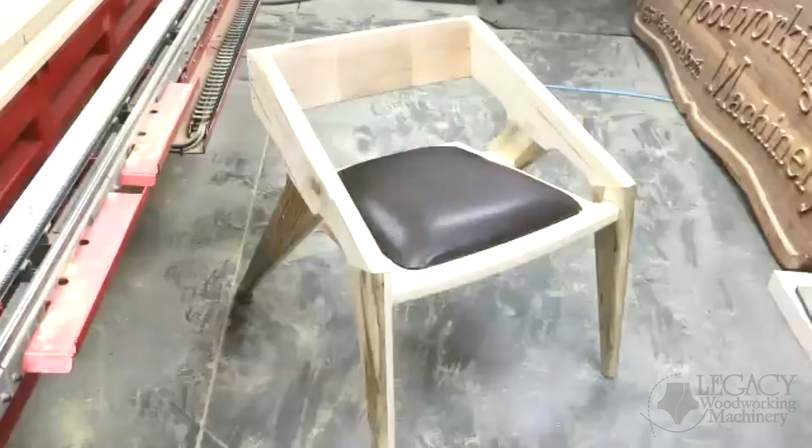I got the camera here, I'm going to turn it over. This is the chair, and this picture doesn't do it any justice, but it's a pretty phenomenal chair. It's pretty big - it didn't use any clamps to assemble or anything. It uses these dovetails to interlock everything together. He did put some brass pins back in here and did the seat and everything. This is a project they're working on - they're going to build and have ready for the school, so the students can build this project if they'd like. They're a pretty aggressive bunch of guys we work with - it's kind of fun to see everything they come up with.

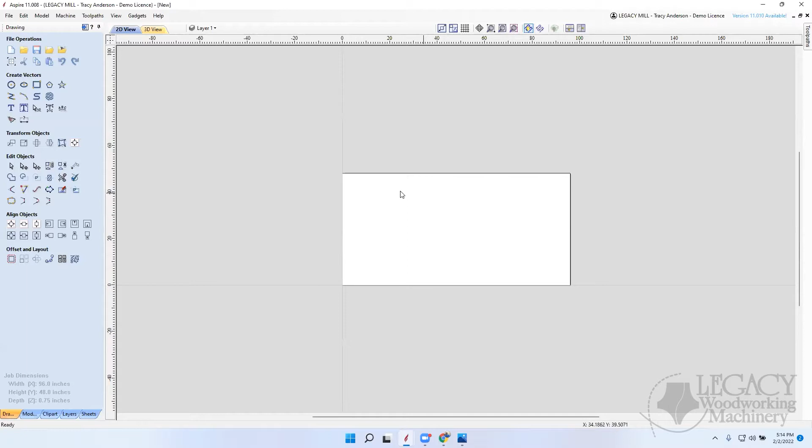So I'm going to start off by drawing a line on here. Then I'm going to move that line using my move tool, relative to where it's at in the y-axis, 39 inches. So this is my wall, and from the wall to the edge of the table, not the edge of the machine, but the edge of the table, is 39 inches, looking down from the top view. So my swing arm is going to be positioned right here in the center, land on this wall, and be able to swing right here. This will help us determine the length of the swing arm, so it's not too long and not too short.

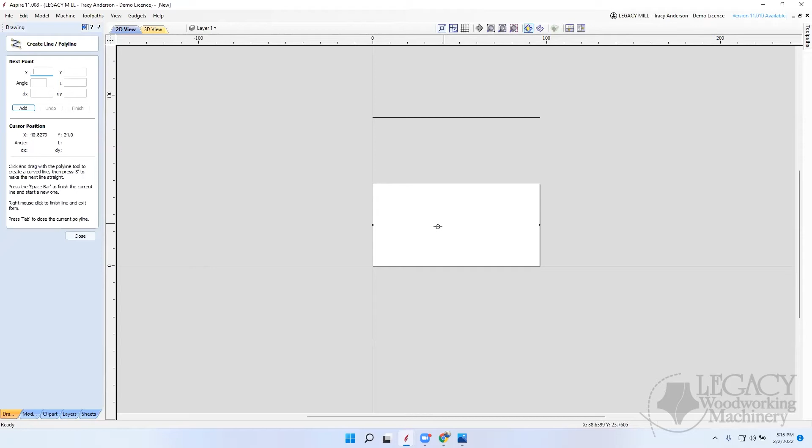I'm going to draw another line here to help me, just to give me a kind of reference. Let's get out of there and do that again. So this line is going to be down along the bottom here. And the same thing, I'm going to use this to move it up 16 inches, so 1/3 of the table, like so. So I want the arm to end right here, so it's going to swing back and forth like this. And the hose will reach this corner when it's here, and when it's in the center, it'll reach back to this edge. That'll give me a nice center for the end of the arm.

So depending upon the size of the hose you're going to be using, you can build this differently. I'm going to build it as 6-inch, but you can obviously build it as 5.

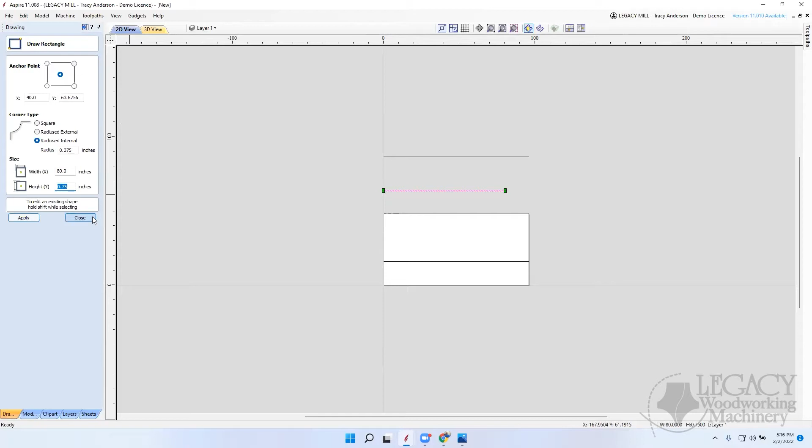So I'm going to draw a top view of the part. I don't know how long I'm going to make it yet, so I'm just going to draw it up here like this. This says 80 inches, and I'm going to make it 3/4 of an inch, 0.75. Okay, and then, oh, it looks like I have radiuses on those corners. Let me go back in and fix that real quickly. Yeah, let's do a square corner, not a radius.

I'm just going to Control-C and Control-V to copy and paste, and then I'll use this move tool. In the y-axis, I'm going to move it. I want the opening to be 6 inches, so I'm going to move it back 6 and 3/4 of an inch, so that I have 6 inches spacing between these two. So this is a top view - these are actually the side pieces that go down, and then, of course, I'll have a piece in the middle. It'll be along the top.

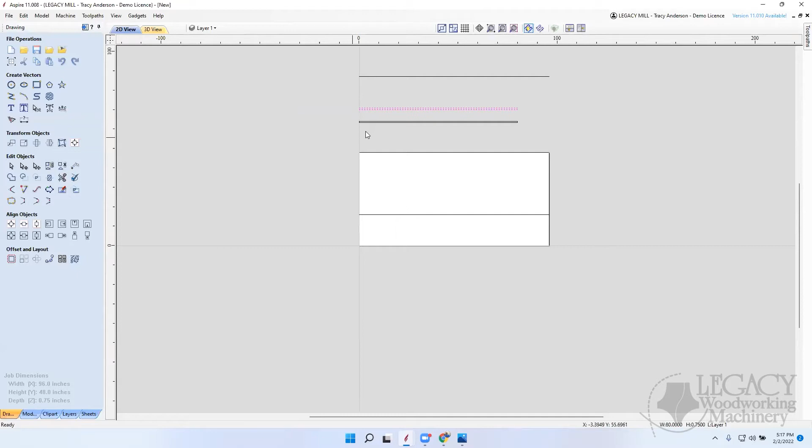So we can draw that in real quickly just by drawing another rectangle, from this corner to this corner. I don't know the length yet, but I'm not worried about it. I'm just getting the basic construction, and then we'll figure out the length.

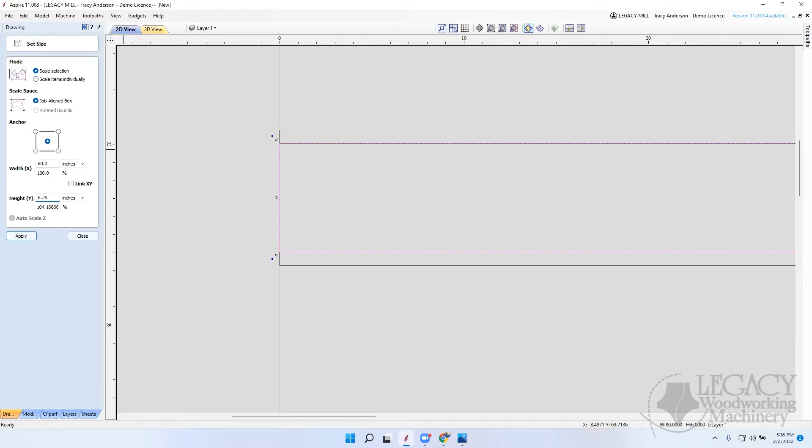Now, when I join these together, I like to cut a rabbet in here for relief. I've got it selected, I'm just going to increase the size right here. We'll unlink it, so it's still 80, but we're going to make it 6.25 inches, adding the next decimal place. What that does is make it go in 1/8 of an inch. So I'm going to cut this rabbet into the side pieces, and this top piece is going to fit down into it, making it easy to assemble and glue.

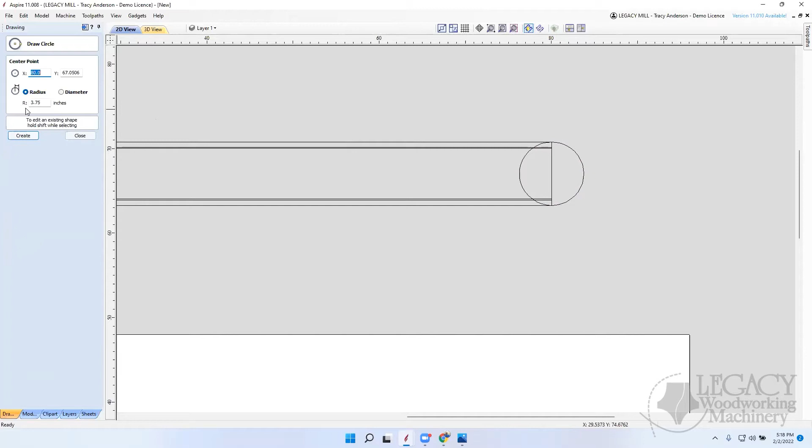Now we can focus on, we're going to have a radius down here that we're going to swing on. So I'm just going to build a circle, going from the center here up to there. I'm also going to create another circle that it'll actually pivot on, and I'm going to make it 1 inch in diameter. I'll just click here in the center, and it'll place it right there. So that's the pivot point, and this will show me the clearance.

So if I swing it, I can put this against the wall or the mounting plate, and it'll clear. So for example, if I was to draw the wall in here right now, I could draw something like this. We'll make the width 0.75, and let's make it about 32 inches, something like that.

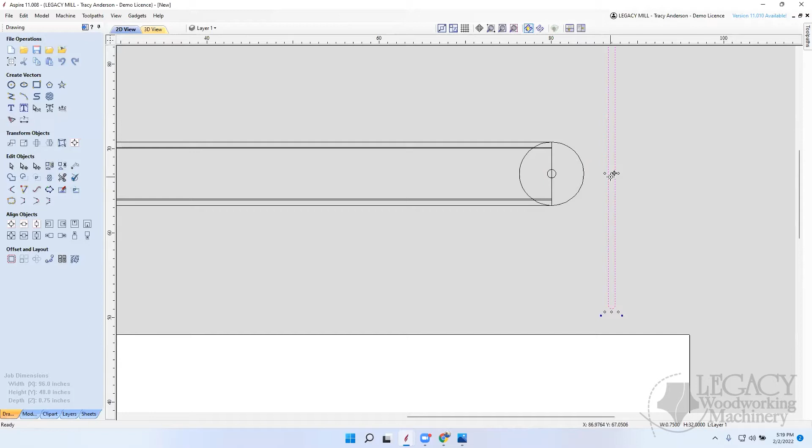Then we can take this, zoom in here a little bit, and just drag it till it snaps to that point. So that would give me 0 clearance. And so I might take this and move it back maybe 1/8 of an inch or something. So relative in the x-axis, I'll go 0.125. So when I swing it on this point and it goes 90 degrees, I'll have a little bit of gap here, so it won't be rubbing on that baseboard.

Now I'm going to draw one other circle in here because this board... I tried setting the settings for this mouse and it doesn't work. I got to get a different mouse.

This is a nightmare. Okay, but I'm going to swing this one out here to that point right there. So this one here is just to give me my clearance. So I'm going to delete it because I'm not going to use it.

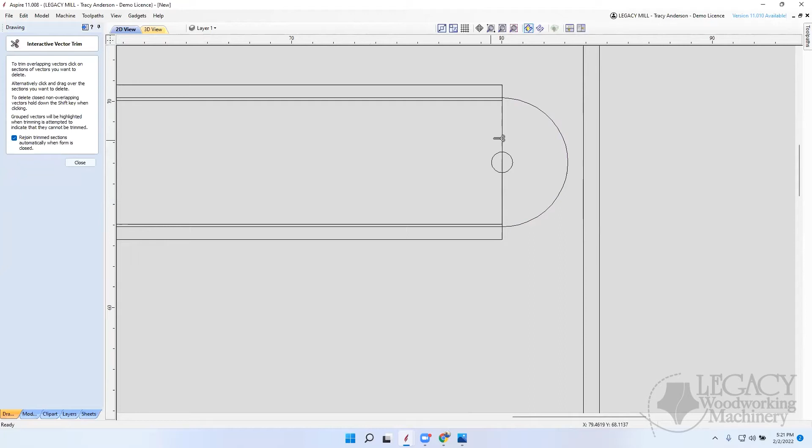And I'm going to use my scissor tool here to come in and trim this up. All right, there we go. So now this piece, well, let me trim that other part as well, and I'll have it rejoined. So now this piece right here, it didn't join. Okay, let me see if I can join these together. Oh, here's the problem, I've still got this vector right here, so you really need to zoom in. All right, let's see if that rejoined. If not, we'll join it later.

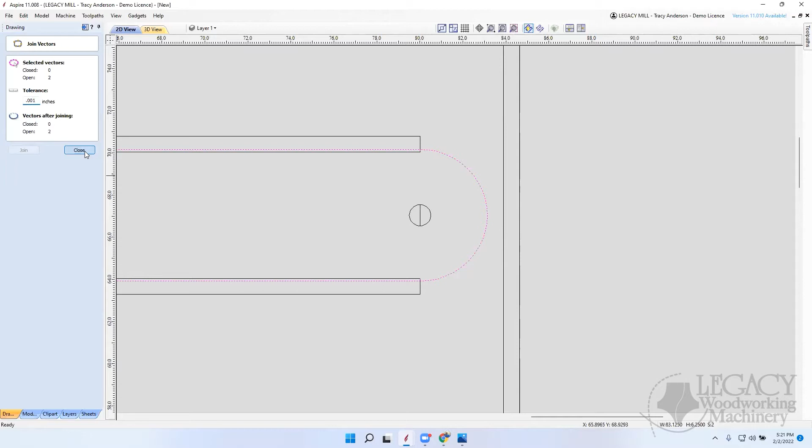No, it didn't. Okay, so if I take this guy and this guy, then I can join it. Maybe I can join it. No, it's not going to let me join. So we'll worry about that later. Right click and then select join vector. Join close vector. Move endpoints with smooth curve or with a line. We'll just do it with a line. All right, let's see if that works.

Hey Tracy, this is John. You bet, I found in version 11 that I can't join anything either. I always got to use join it with the little line segment or arc. I can't get it to join naturally anymore in this version. Interesting.

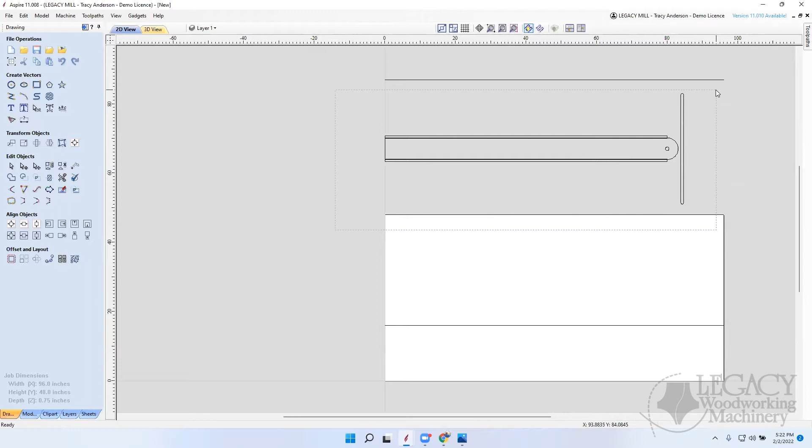All right, so here, this is the top view and the spacing from the wall. And so I'm going to take all of this and rotate it so that it's like so. I'll actually center it so that it's in the center of my table here. And then we're going to move it down. So let me just kind of get this close so that I can zoom in and move it.

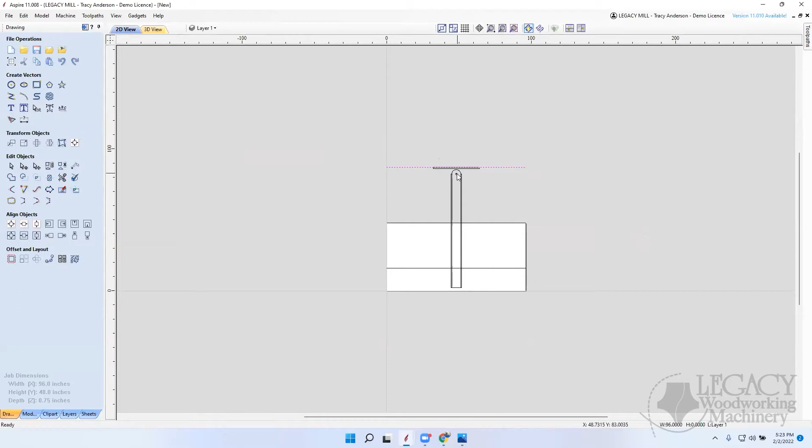So I'm going to grab this point right here and see if we can snap it to the center. Okay, so there it is along the edge, and we can ensure that it's centered on the table by using the align tools over here on the left. There we go. So again, this line represents my wall, there's my mounting plate, and I'm going to have a pivot point that it's going to swing on. So that means that this doesn't have to be so long, I can just bring it back to here. And that determines the length for me automatically.

We'll do that to all three of these guys.

Now if we were to draw a circle in here, we could kind of get the arc. So it's going to go right there to right there. That's the arc of the end of the thing, and that looks like it's going to work just fine. I could actually calculate the exact distance from here to here and here to here to make sure it's perfect, but this is going to be plenty close. It might only be an inch or so off, so this is going to work.

So I can erase these because we're not going to use those, they're just kind of guides. That's how the arm is going to be in relationship to the wall, the length of the arm and so on. So now we can start designing the parts for the swing arm.

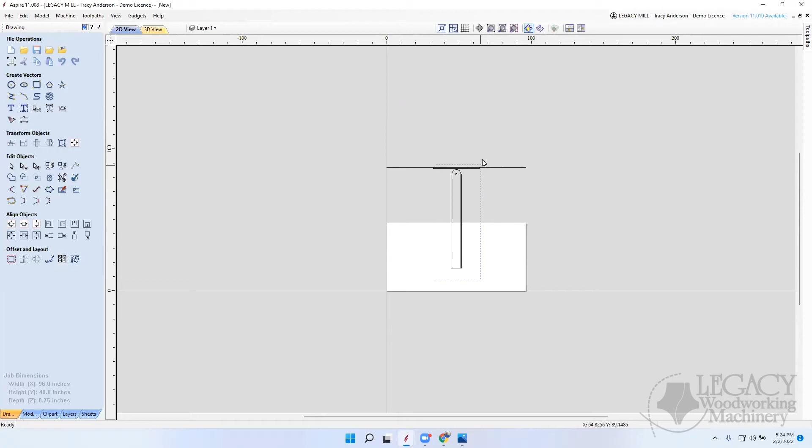I'm going to take all of this, Control C and Control V, and then I'm just going to move it over here out of the way. And we'll rotate it, something like that. So now we can work on drawing this part up.

Now we have the top part basically done here. We're going to cut holes into it because we want to remove as much material as possible to make this swing arm as light as possible. So we're going to do that on the sides and the top.

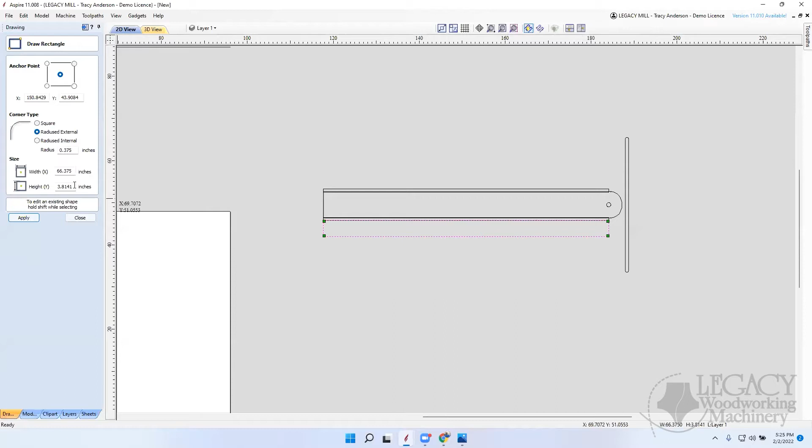So what I'm going to do now is draw a part, and I'll just use this as guides. All right, so it's that long, that's the length, but for the sides I'm going to make them as wide as you want - maybe like 10 inches or 12 inches or something like that. Let's make it 10 inches here.

I really need to get my glasses on. Okay, and then we can just move this down. So I can either drag it down, or use my arrows on the keyboard, or use the move tool. We'll just get it down here, something like this. So this is just kind of an outline of the side piece.

And I haven't found a really... oh, I have rounded corners in here as well. So I'm going to have to go back in and change this to square corners, like so.

I haven't found a really good way to do this next part, so what I'm going to do is draw a line from here to here. And it didn't snap to where I wanted it exactly. Let's try it again from here to here.

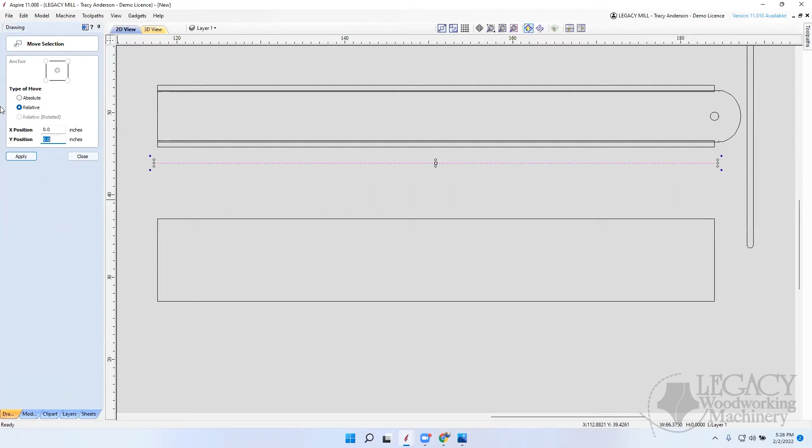Okay, now that line, I'll use the move tool, relative, we're going to go down 6.75. And I went positive, we want negative, so I'll undo that and go back down to minus 6.75. All right, so I just needed that point right there, and I needed an easy way to do that.

So I'm going to show you a couple of techniques. You may not like the way I do it, but it's one method and you can change it. I put it into node editing mode using the letter N, and I'm just going to drag this up to there. So now that is the shape, or close to it, the shape of what I want.

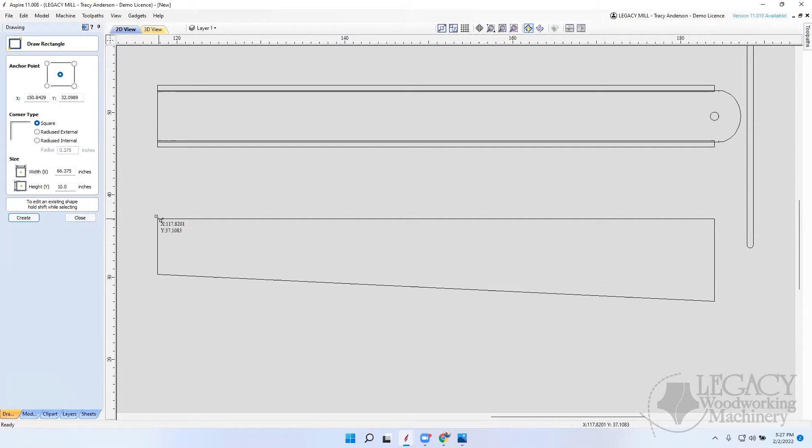I want it thicker here and as thin up here as possible. Now I know I'm going to have this part inside here. If I draw a rectangle - let's try that again.

Okay, I'm going to start right here and just bring it down like this. Now I can make it in the width - we'll make it 0.75. And then to get the length, I'll just drag it down to this edge.

So I'll double click on it so I get to that, grab this down, it's just going to snap to there. And then, of course, I can move it by grabbing this corner and just snap it to there. So that is the top piece right there.

And I need to have a flat piece down here for it to pivot on as well. And so by looking up here at this part - okay, interesting, I actually trimmed this incorrectly, it looks like.

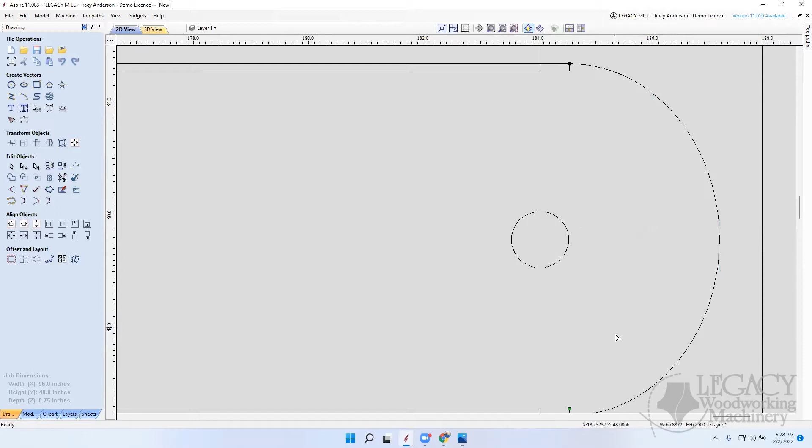Okay, this is what might have been screwing me up. I'm going to delete this point. Well, I'm not going to delete that point, I'm going to cut this. Cut the vector. So somehow this screwed me up, but we'll see if we can fix it real quickly.

And I don't want that. And I don't want that. And of course, that was part of that. We're having a good time here. Okay, so what I'll do is I'll trim these up.

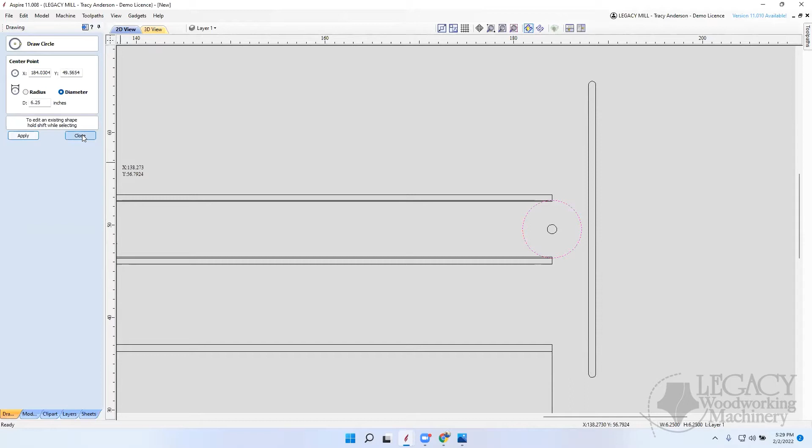Okay, now we're going to go back and draw our circle again from the center here up to that point. All right, so now I should be able to cut it and it should join it right back here. So this becomes part of this.

We're going to try it one more time and see what happens. We'll join them together. Not both of them, just the one. And we'll try it here as well.

Now let's see if that is right. Yeah, okay, that's how it works. I don't know what I had done to screw that up before, but now this looks right.

Okay, so that is the top part we've got in here. That's our pivot hole, and those are our side pieces. And so this is the side view, and that's the top part right there.

All right, now I'm going to need a flat spot down here because I'm going to have to pivot right here. So if I drew a circle in here the same size as this arc, I already had one, but I'm just going to draw one in like so to give me a position.

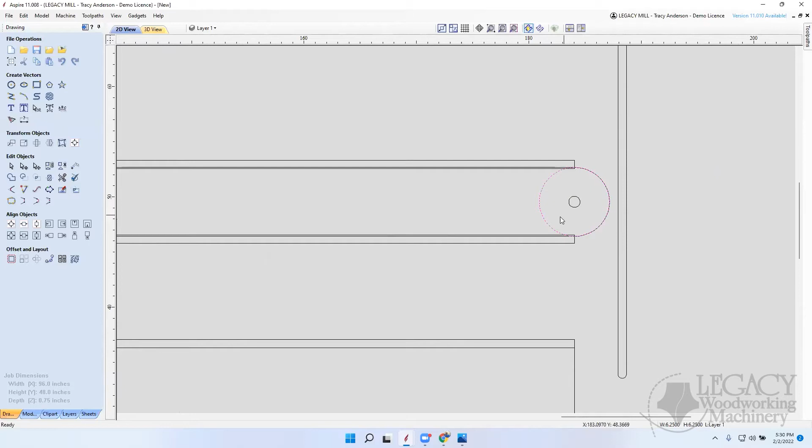I'm going to copy that, Control C and Control V, and I'm going to move this one down to there. All right, so this is going to pivot around this ring right here. This could be an opening for the hose to go into.

So I need a blank down here at the bottom that is this long. So I'll just draw a line here. It goes from this corner here down, and we'll just make it extra long. It doesn't matter.

All right, so now what we're going to try to do is I'm going to go into node editing, and right here, I'm going to right click and say insert a point. And then I'm going to see if I can reference this corner. Yeah, sure enough, right there. Okay, so by inserting a point and referencing this corner, it made it go straight.

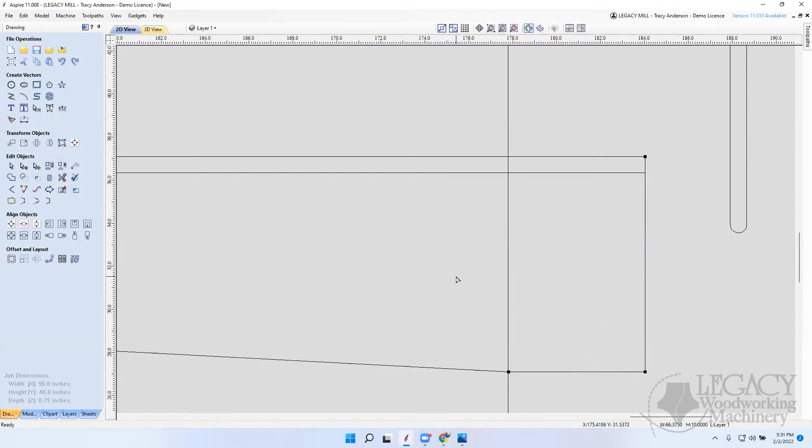So now I have a straight edge down here, the width that I need, and a straight edge up here. So I don't need this line any longer. Okay, and in reality, if I was to draw...

I could probably use a reference point to do this, but if I drew a line straight down like so... oh, I hate this mouse. Okay, then I can take this guy, and in reality, it's going to come all the way back to here. So that top piece comes all the way back here, and I need a bottom piece that does the same thing.

So we'll just draw something in here, starting from this corner here, and we'll go to this corner, and we'll make it in the y-axis, we'll make it 0.75.

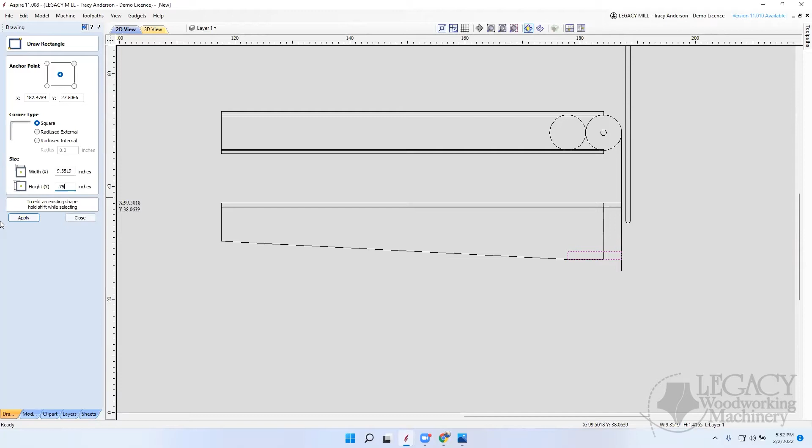And then we will get out of there, come back, all is forgiven. All right, now we'll grab this guy right there and just snap it to that corner. Okay, so I'm going to have a flat piece at the bottom here and a flat piece that comes at the top.

And so the bottom piece is going to be just this end. It's not going to go all the way along. It's only going to go to this point. But now I can pivot off that point right there. And this is our side view.

So we've got the basic construction done here now. All right, we would need to lay out the whole of this piece right here.

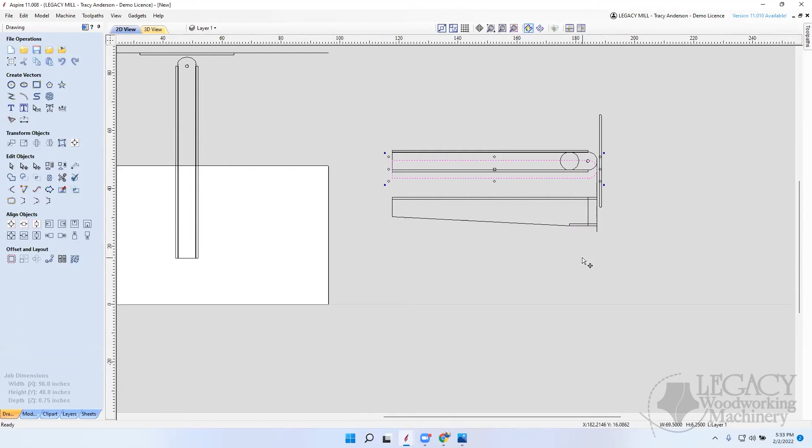So if I was to copy this, I don't need that any longer, I'm going to delete it. I'm going to copy this and Control C, Control V, and let's just slide it down here a ways, like so. Yeah.

I would need a part that is this long right here. I can zoom in. Okay, so I would just draw a line straight down. All right, and then I could trim this as well.

Okay, so this is the bottom piece. However, I do want this cutout right here, I just realized. So let's take this guy, Control C, Control V, grab it from the center and just snap it to the center of this line.

All right, and then of course we need this circle here, Control C, Control V. Let's just snap it to the center of that right there. And then let's trim this up.

So, oops, I didn't get that hole centered. Let's see if we can center it - I'll just put it back here first, and then I'll use this as a reference. There we go.

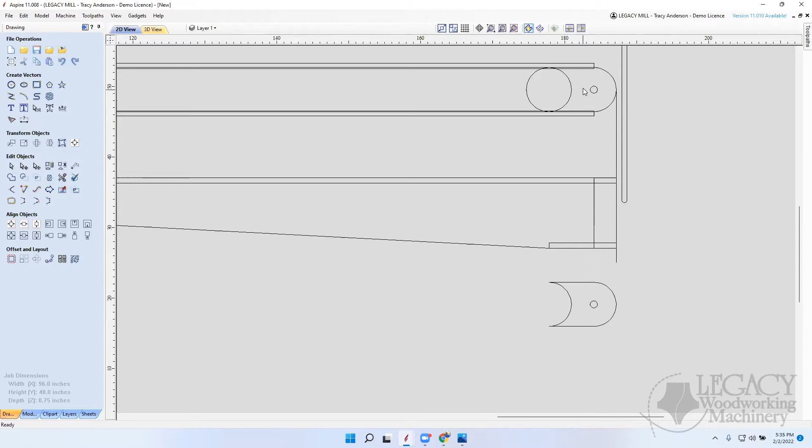Okay, so this is the edge side view, and that's the top view of that part. And this is the top view of this part up here at the top. And of course, this is that side rail.

So does that make sense to everybody? Everybody following me so far? You got a question, jump in here. I have a question - you bet. Why the arch on that bottom piece? Why is it cut out?

Okay, the reason I cut this right here at the bottom out is because my hose is going to come up here. And if I don't have it cut out, then the hose can't go in until it's clear down here. But by cutting it out back to this point here, I can have the hose come in here closer to the wall. That's the only reason, is for the hose to come up.

Thanks. Okay, because if this was straight across, the hose would be clear down here, but this just allows me to move the hose back in here closer to the wall.

All right, now there's a couple of ways here to kind of remove some material. We want to retain the structural strength, but we want to remove as much material as possible. So one of the techniques I'll use is I've got this outside here selected, and what I'm going to do is use my offset tool over here on the left, and say offset by 2 inches, and we're going to go inwards.

And I've got it selected, so when I click OK, it creates this second vector here. And this is what I'm going to use as guides to kind of trim out holes that go inside here.

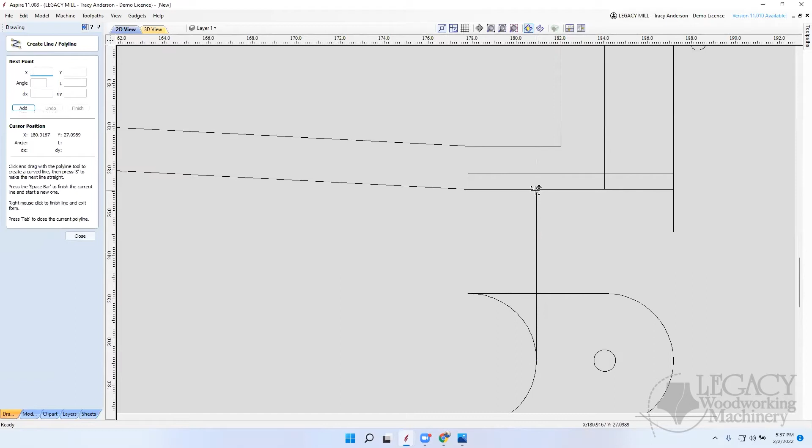Okay, so we know that the hose can come in right there, and so I can draw a line here from this point, and I can have it move this way, and I'll have it go 135 degrees. And we'll make this one longer - I'm going to make it 20 inches. We can always trim it.

Okay, so these are just guides that show - let me get rid of this now. This just simply shows that the hose can come in right here, and it can go along the long inside here, and then it's going to roll back down here, and I can actually attach it to those braces. These braces will give me strength for the overall design, and also give me something to tie the hoses to. So now with this in here, I can decide where I want to cut these holes out.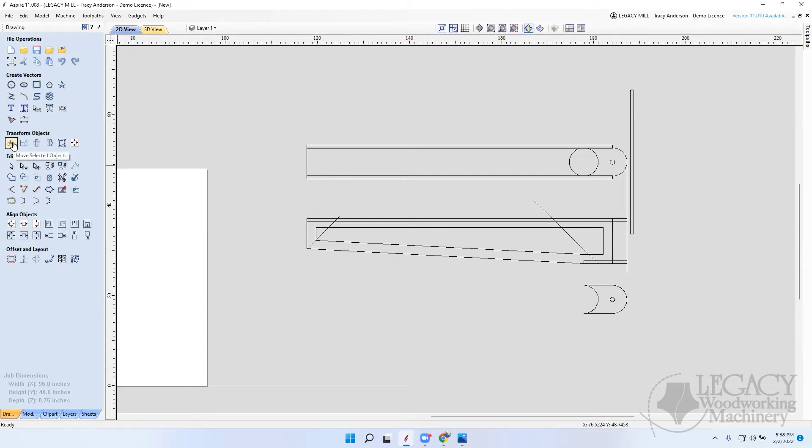Okay, so what I'm going to do is I'm going to draw a couple more construction lines, and I'm going to go from that point just straight down.

And I'm going to go from this point straight down like that, and now I'm going to measure this. So from here to here, I got to do horizontal, sorry. From here to here, it is 50.5113, and we can round that to probably 50.5, or 50.51 if we want to go 2 decimal places.

All right, so I have to decide how many cutouts I want in here, and I like to have 4 or 5, just depends on the part.

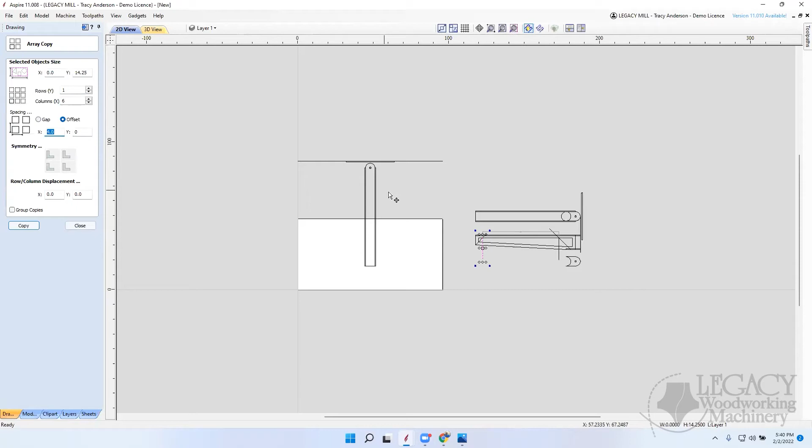So if I take this line right here and use this array tool, copy and array, I can say I want just one row of these lines that goes along here, and I want, let's say, 6 lines, okay? And I want an offset. In the Y, I want 0, but in the X, I want, and I need to zoom in to see what that dimension was again. It was... come on, let go, let go, let go. Oh my gosh, I hate this mouse.

50.51. So in the X, I'm going to put 50.51 divided by 5, and then I'll hit the equal key. And it's 10.102 inches, so we'll copy that. And we'll zoom out, and you'll see here I now have 1, 2, 3, 4, 5 openings that are equally spaced inside there.

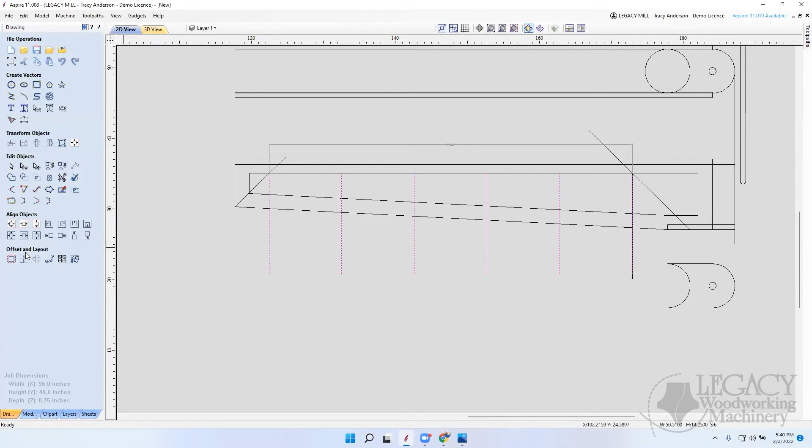Okay, now I'm going to cut this out, but I need a web in between here as well. So I'll use this offset tool, and I'll say let's go 1 inch, and let's go inwards first, and that puts them all that way. And then I'll say 1 inch outwards, and it puts it that way.

Okay, so now what I have is basically an opening that I can cut out right here. So I'm going to use my trim tool to kind of finalize what this is going to be like.

Okay, and this will just take a minute, so we don't care about those other lines, but I just want to trim out everything that's around these openings, so I just have the opening by itself, like so.

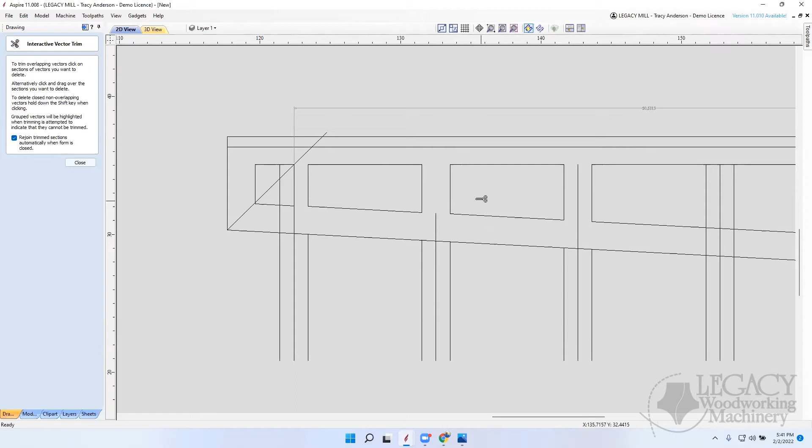The rest of the lines we can just delete. And if somebody has a more clever way to do something like this, I would love to hear it, because this is kind of tedious work, especially with the mouse that gives you all kinds of problems.

Okay, so I said close those when I clicked on them, so it cut it. So now they're all open like this, and I can come back and delete all these. Again, these are just constructions, I don't need this any longer. All right, so there I have where I want these openings.

And to be honest with you, I probably should do the same thing here. I should have thought this through a little bit, but let's just do the same thing here, because we might want a set of holes on the top that match the sides. You know, that's an option, and that's what I'm going to do here.

And actually, instead of doing all those, I could just select one of these, right? And I Control C and Control V, and then I can just take it down there. Control C, Control V, same thing. If I select it and then double click to move it, I can just move it to there. Control C, Control V, and move it down,

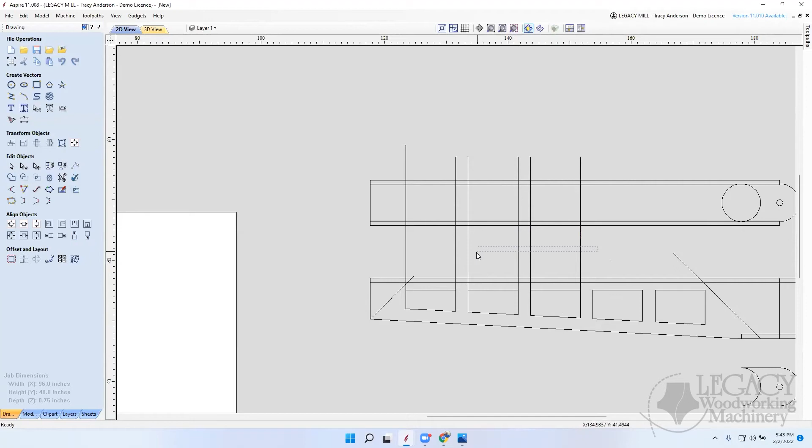and so on. And since these are all the same lengths, I could actually take all 4 of these, Control C, Control V, and then it deselected them, so I got to reselect them. Like I say, I hate this mouse, but I'll just move them all down so you can see, instead of drawing each line individually, I can just do that.

Now I could do the same thing here. I could say, if I wanted the same 2-inch spacing up here that I have up there, I could take and draw a line along this top edge and draw a second line along this bottom edge.

Okay, now with that selected, I'll do another offset and we'll make this 2 inches again. And that went the wrong way, so I'm going to Control Z. I'm going to say go inwards, or to the other side. And then I'll click here and select this one, and I'll make this one go outwards. So I've given me 2 inches of border on the top, the same as I did on the bottom.

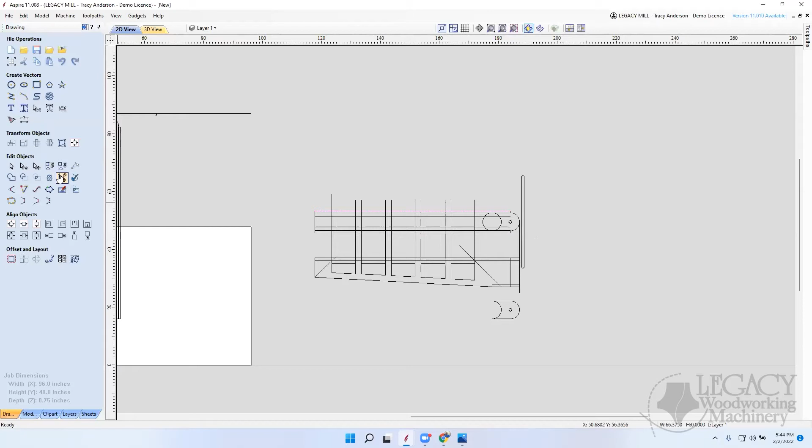And then we'll do the same thing. I can trim this up. Now, and the other way is that I could just trim one of these up, and then I could copy it and place it where the other ones go.

Okay, so a lot of array copy too. Yeah, you could do an array copy if you know the distance and so on. So there's many ways to do this. This is kind of the most laborious, most amount of work, if you will.

But we're almost done, so I'll just finish this off.

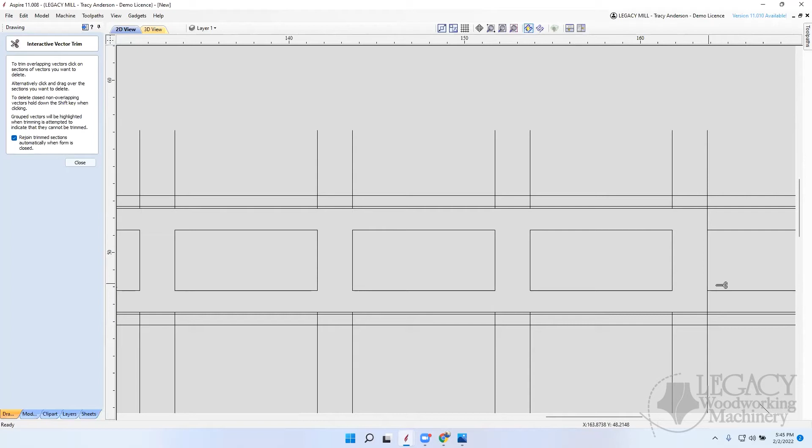Did you copy from the side piece? You mean these lines that go vertical? No, the horizontal lines. Okay, hold on, let me just finish this. When you did the offsets, what I did is I drew a line along this top edge right here. But isn't that the side piece? It is the side piece. My overall width, I wanted 2 inches from the overall width, and that's why I went from there. That's just a guide. I could have moved those instead of offsetting them, and then I wouldn't have to erase them. I'll just erase all this garbage.

Okay, so we're getting pretty close here.

By the way, when I designed this, I did 2 of these, one at 4 inch and one at 6 inches. On the 4 inch, I made it so the hose just came up from the bottom. On the other one, I didn't know if I wanted the hose to come up from the bottom or drop down from the top, so I actually left this hole right here in the top piece. I won't do it on this particular example, but I had a piece come up here on a 45 as well, so the hose could come down through here, and I had relieved a circle here like I did on this bottom piece, so the hose could come down through here and out, or come up through here and out, either way. Just an option - I ended up only using the bottom, so it was unnecessary to have this hole, but I did put it in just in case.

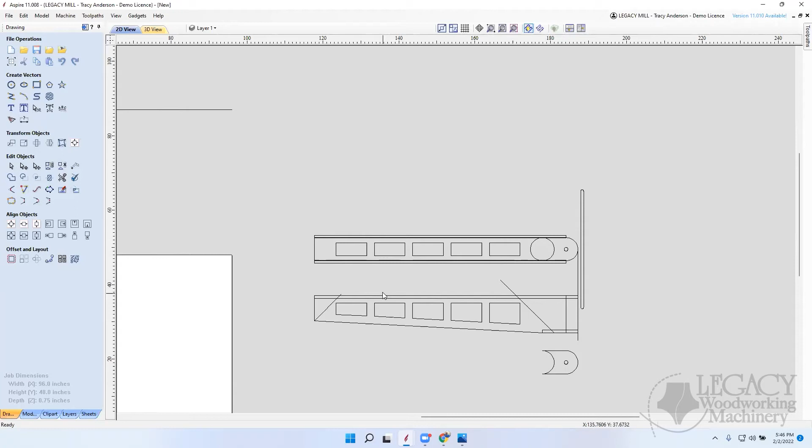All right, so then the one tool that I wish this had, and it may have it in the gadgets, but I haven't looked for it, is to draw circles based on tangents. In my other CAD software, TurboCAD, I can say draw a circle based on 3 lines, tangent to 3 lines. But these are not rectangles, they're kind of an odd shape, and this side's wider than this, so I can't draw a circle here that goes from here to here and touch this line as well easily. That would have made perfect circles on each end regardless how big it was. So what I'm going to do instead is use this fillet tool, and give it maybe 1.25 inches.

And then I'll come up here, and it'll change to a check mark every time I use it. And so this gives me a radius, which I kind of like. Like I said, I use TurboCAD, and I could do a tangent off the 3 lines, so it was a full radius all the way around, which I liked, but I couldn't find how to easily do it inside Aspire. So I did it here. Now, this is another time when it would make sense to build this one all by itself completely, and then do an array of these other ones, because they're all exactly the same.

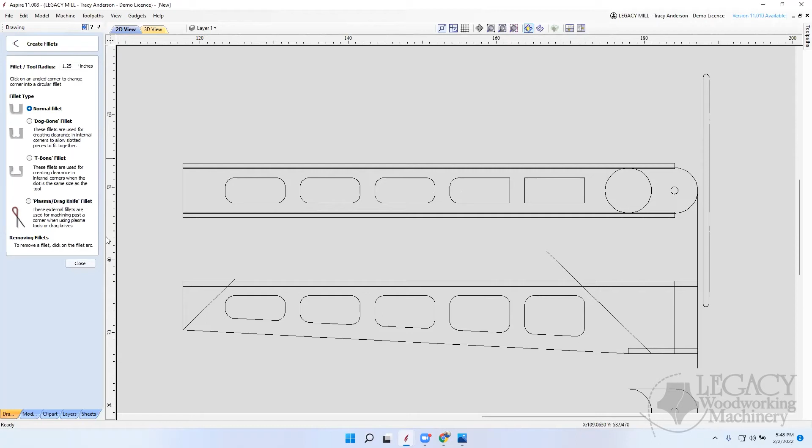But Tracy, can you try doing it using the arc tool? Go to the arc tool and pick the center of your line, then pick the top and the bottom. All right, let's try it here - from here to here. No, pick the center of the end line or the end of the rectangle. Center here? No, the center of the line, go to the left. Here? You're right in the center there, yeah. And then pick top, and then pick the bottom. Oh, you got it, there you go.

Okay, so there you go. I like that, thank you very much. Similar to what you can do on AutoCAD with the different point arcs, depending on where you start. And I like this better than just the other one. So thank you very much, this is awesome.

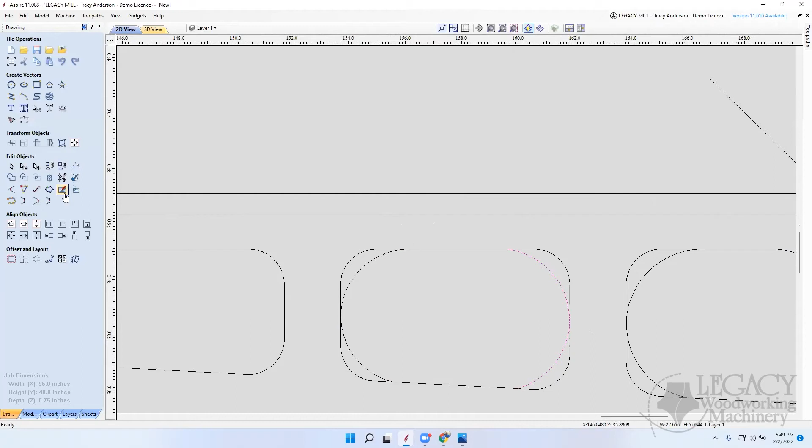Just another way of doing it, right? Yeah, and I like this better. Now I'll use these trim tools and make sure they're rejoined, and I can trim off these.

You gotta be careful because some of them might not be tangent. You have to look at that, and if they're not tangent, we're in trouble. So they're kind of not - yeah, you can see it didn't quite work there. That's because of the angled line.

So I'll have to work this out a little bit. I'm not gonna spend the time doing it right now, but there is the option if you want to experiment with that and play with it.

So we're just gonna delete these right now, and we'll use this method. Now let's go back and finish this top one real quickly.

You could probably also just do a bigger radius on your fillet. Yeah, I couldn't go bigger than what would fit on this very small one. I could increase the fillet on each one, but to make it simple, I just did it like that. And it looks nice, it's cool looking. I like it.

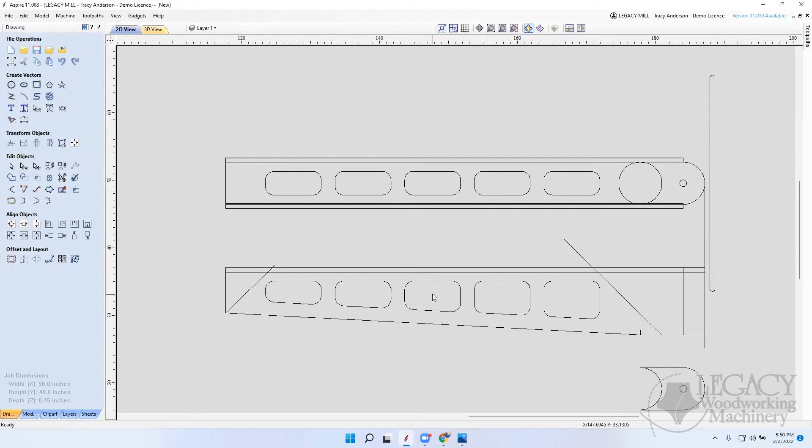All right, so now we have this bottom piece designed, we have the top piece designed, we have the side piece designed. What I don't have is a piece that goes right in here, and I know that it's 45 degrees.

If I use this measuring tool right here and measure from here to here, it tells me my distance - it doesn't print it on the screen, it just tells me in this little box over here that my distance is 12 inches. So I haven't found a clever way to do this either. If anybody has any ideas, let me know.

But I'm going to draw a box out here. I'm going to make it 10 inches by 3/4 of an inch, and I'm just going to put it right - and of course it didn't do that. Let's do 10 inches by 3/4 and apply that.

Okay, and then I know I need to rotate it to 45 degrees, and then I can take that and place it in here where I want it to go. But I couldn't figure out an easy way to draw it based on that 45-degree angle, so I just did it like that instead.

All right, and then I could draw the same thing down here. So I'll just measure to give me an idea from here to here. Can you do an offset? I could do an offset of 3/4 of an inch, but I got to draw 90 degree lines perpendicular to that line, and so on. So that's a possibility, I haven't played much with it.

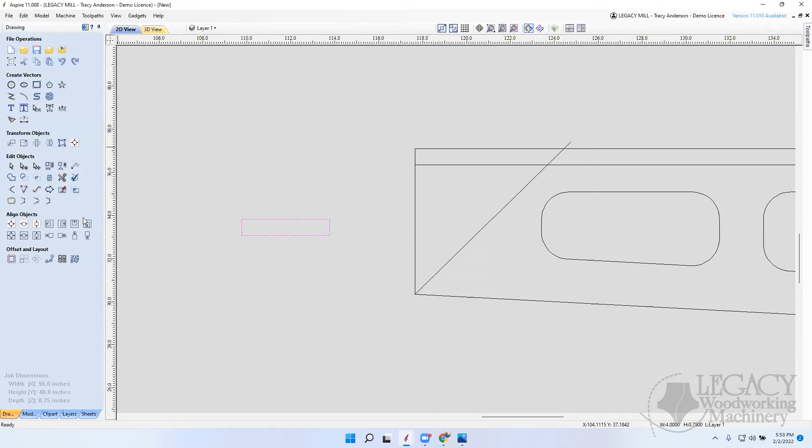This distance is 4.8, so I might make it maybe 4 inches. I'll do the same thing here - if I just drag it out here, I'll make it 0.75 by 4 inches and apply that. Then I'll use the letter O or 9 to rotate it, and double click to move it, grabbing this side and moving it to the center like so.

And 4 inches isn't enough, so I'm going to Control Z to bring it back. It was here, 8.4 - it was 8.4, Tracy. Is that not what it was? 4.8. 8.4? Okay, so we'll come back in here.

We'll make this maybe 7.5, a little bit less. That's what happens when I don't have my glasses on.

So now we'll rotate it, and again double click it and grab this edge and just put it up against there. Now that's a little too long, so let's take it down - we'll make it maybe 6 inches. Okay, come back.

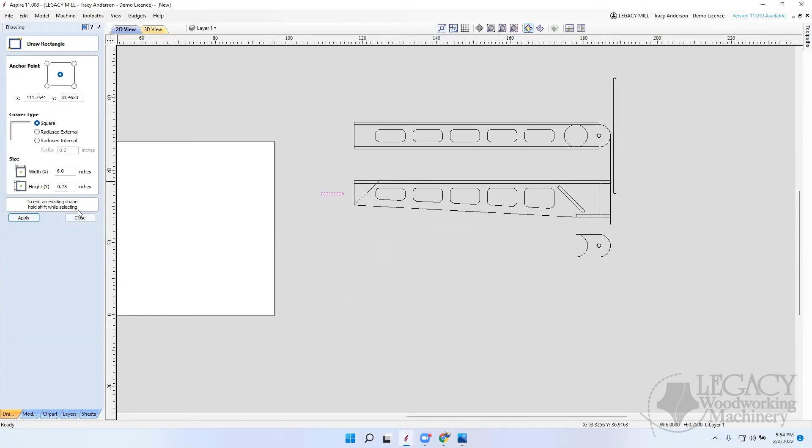So we'll try this one more time. Yeah, let's just make it 6. We don't care if it's exact.

And again, it's just a spacer, so the length is not that critical, but you can see how I left a gap at each end.

Okay, so now I would cut this pocket in the side pieces an 1/8 inch deep. I would cut this rabbet up here at 1/8 inch deep on the parts, and do the same thing here, and then cut these parts out.

So if I need this part, I'm going to Control C, Control V, and I'm just going to drag it out here somewhere, and I'm going to rotate it so that it's level.

So that is the length of the part that I need, but I need it at 6 and 1/4, an 1/8 inch on each side in order to fit into that pocket. So I would come back into here and simply change this from 0.75 to 6.25. So there is the part that's going to fit right inside here.

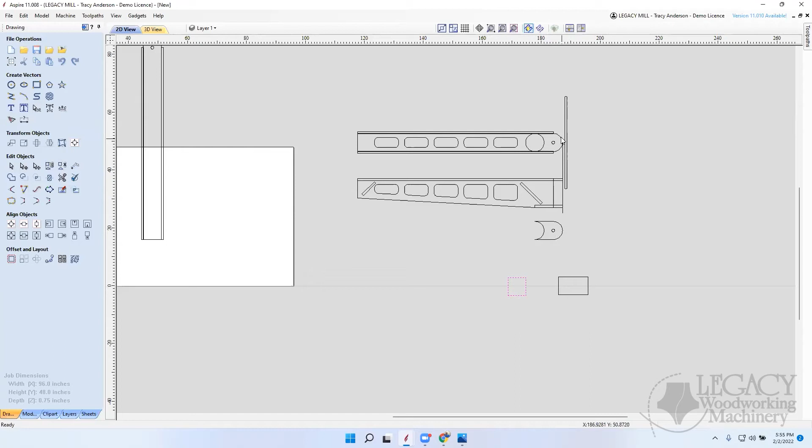And I could do the same thing here. Control C, Control V, bring it down here, rotate it, change it to 6.25 in the y-axis, like that. So that's the cutout part that goes inside here. Here's the cutout part that goes here. That's the bottom part, and here's the top part with these cutouts and that hole.

And if you don't want this hole, you wouldn't put it in. We just wouldn't program it, and we'd have it be ready to go.

So now what I'm going to do is take this guy and just move it out of the way. It's served its purpose, but I'll leave it there. And let's put these guys where we want them. Now I'm going to need 2 of these, yeah, I'm going to leave this as a master, if you will. And I'm going to Control C and Control V.

I like to do this so that if I want to go back and make a change, I make it to the master, and then I can modify it. Now this one here, what we're going to do is get it so that it fits in this blank. And I need 2 of these. So I'll Control C, Control V, and...

Let's see, we may want to mirror this. Maybe Tracy, are those arms rights and lefts? Yeah, I'm going to have to do a mirror to make it a left and a right.

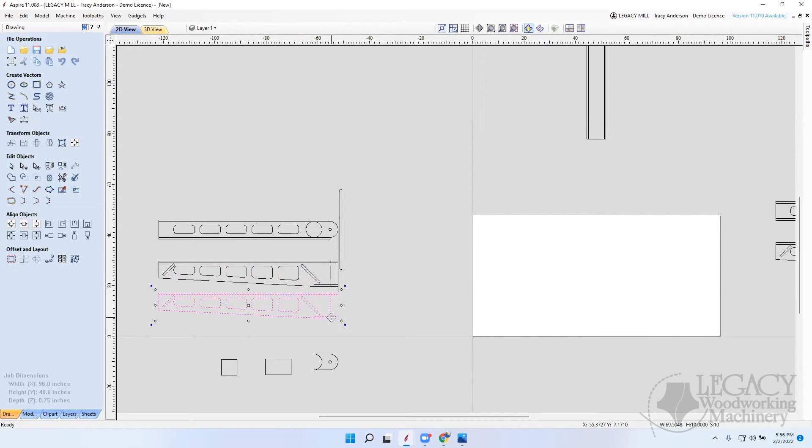Okay, so if I flip it, and we're looking at it, how do we, if I can get all the material in here, I don't care if it takes up the space, I can just mirror copy it. So let's go to mirror.

And we won't do it about the job center. We'll create a mirror copy, and we'll just do bottom like that. And then we'll take that and just push it down a little bit.

Okay, so I don't need all of this, for example. Okay, we don't need that. We don't need this or this. We can delete all of these. Okay, so there's the 2 parts, the left and the right.

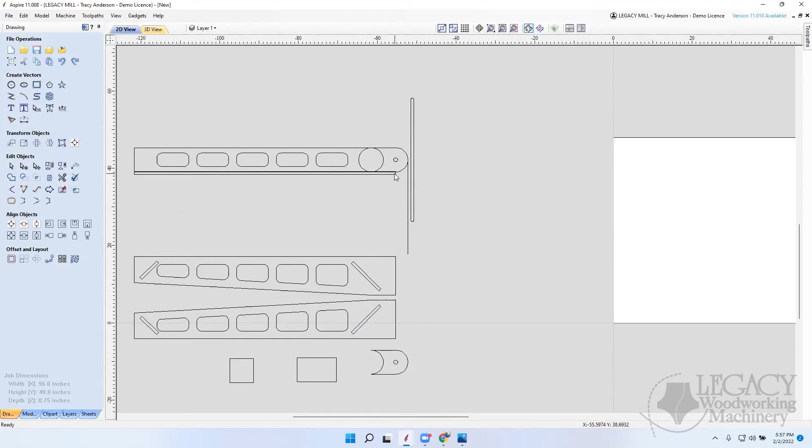And then, we don't need this for right now. We've got the master copy, so I can get rid of these guys. Whoops. Let me zoom in a little bit so I can grab the right part.

What is your wood, Tracy? And I'm going to take that circle. I'm sorry, what was that? What wood are you using?

I used pre-finished plywood. It's a cabinet plywood. I originally got my first sheet at Home Depot, but they don't normally carry it, so I got some at a local dealer that sells cabinet grade plywood that was pre-finished. Now, if you can't get the pre-finished, just use a cabinet grade plywood because you want it straight and true and strong. You don't want a lot of voids.

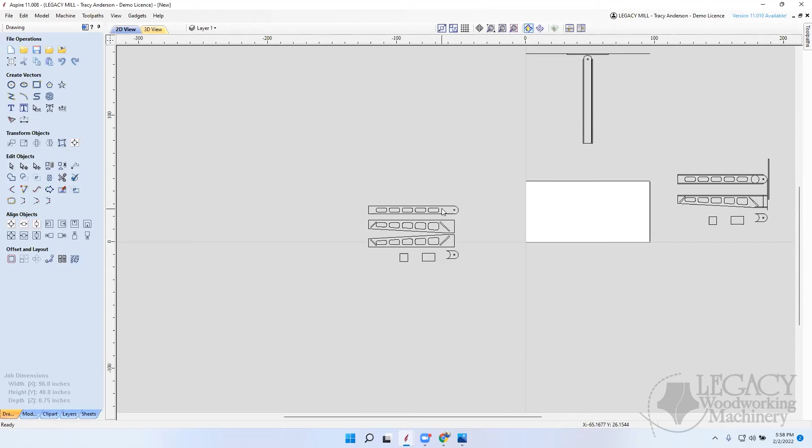You want a quality piece of plywood for this. And so I use 11 ply, 3/4 inch ply. Again, mine was pre-finished, so I didn't have to do anything when it was all done.

Okay, now we can take all these guys and we'll just throw them onto the blank. And you can see they'll all fit here, and I can rearrange this if I want. The only thing I haven't shown here is that I would like to have these pockets in here for the dados. So I would need to draw those in. Let's go ahead and do that real quickly.

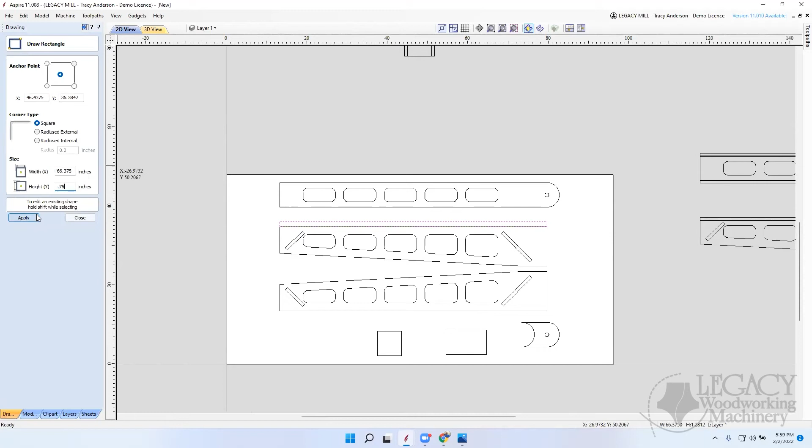Okay, I'm just going to do it out here so I can see it. And we'll make it 3/4, like so. And then we can take that, I'll zoom in here. And we'll just grab this corner and stick it down to that corner. So that's going to be a dado that we're going to cut out.

Okay, and we do the same thing down here at the bottom on this one, and we do it down here at this bottom edge as well. So let's do one of those. I'll just do it for one piece right now, won't take the time to do everything. So this one I'll just bring up here and say it's 0.75.

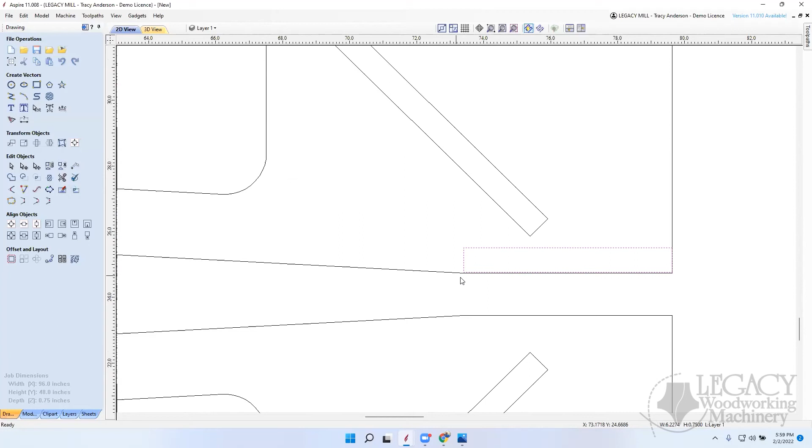And zoom in and make sure it's now located where we want it. So we will just grab that corner and have it snap to that edge.

So I'm going to cut out this little rabbet and this little rabbet and these dados inside here. And then these pieces will all fit inside here, and that will fit between.

So the last thing that I would have is I want to have holes in here so I can screw this together when it's all done. So I could glue it and then just come back and use a drill bit that countersinks and drills, and then pilots the other, or I can just drill the holes in this base table to start with.

And you can determine the spacing whatever you want on here. If you want to put the holes between right in here or whatever you want to do, you're just going to take and put a hole in here of a certain size, and you could do an array along here. I'm not going to bother to do that right now, but you could put holes all the way along here every 6 inches or so.

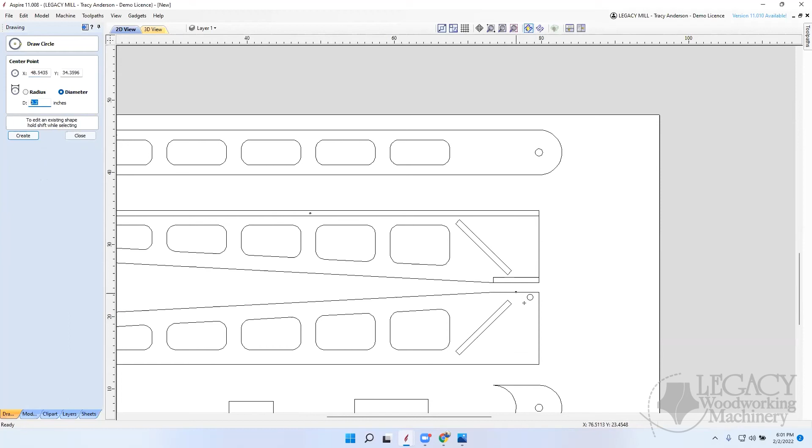All right, and do the same thing down here. You create a rabbet that goes down here at the bottom and put the holes in here as well. And then I put the holes in here as well. And if I make this a 0.2-inch diameter hole, I could just place them like this.

And to be honest with you, I hate working on these angles. I don't know of a clever way to do it. So when I drew this part up, had it here at 3/4, I'd probably put the holes in here and then rotate it and put it up like this. But for right now, I just threw holes in here. They may not be perfectly centered or exactly 1 inch in or whatever, but they'll work just fine. So you can just eyeball it and throw it in there and it's going to be fine.

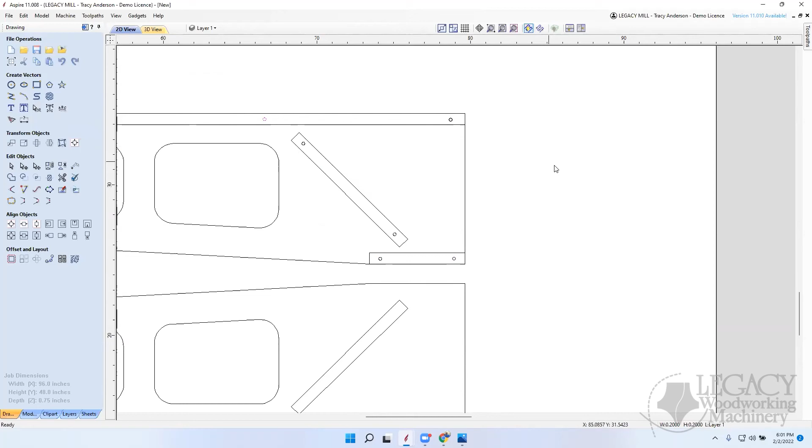And you would do the same thing down here as well. Okay, so I might put them something like that. All right, and it could have holes up in here. Again, I would lay this all out and do an array and make them really nice, but I'm not going to bother with that right now. Just showing you the basic concept.

And this will cut out everything for the swing arm. Now we do have this base up here, and I drew... Come on, I hate this mouse.

Tracy: Wouldn't you now redo your mirroring? Say that again. Wouldn't you now redo the mirroring of? Once I have the holes and everything in here. Yeah, build one part right, and then mirror. You're right, Carl. That'd be the best. I didn't think ahead, so I mirrored and then came back and said, 'Oh, I need the holes.' So yeah, you're absolutely right. That would have been a better approach to it.

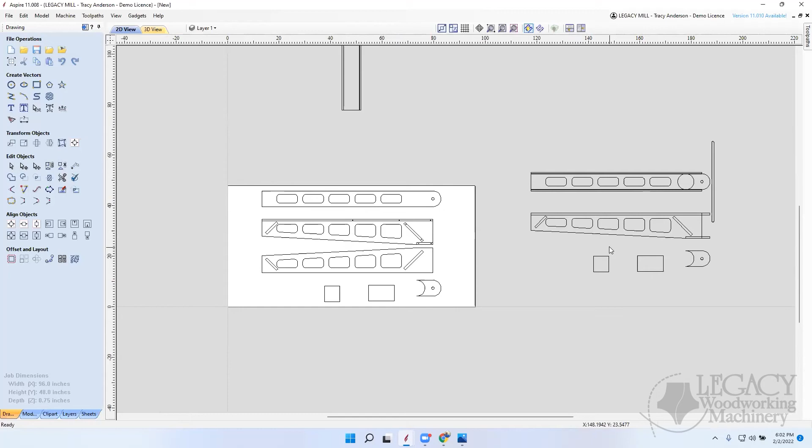Lay those out as an array, get them all exactly the way you want it. Oh, the other thing that I did too, and I'm not going to really lay this out carefully, but I'm just going to show you.

I put a hole in here, and I made it say 0.51, just over a 1/2 inch in diameter. And if I lay out a line along here and then push them up so that I can drill a hole in here, then I put a dowel through here, and that's what supports the hose that's going through here.

On the picture that I have, I've got zip ties. You can actually see the holes here. Let me see if I can zoom in. Yeah, you can see the holes here, and there I have a dowel through that one right there. But when they built it, they didn't have the dowel, so they just zip tied it around here to hold it in place. But I just put the dowels in here, and that lets the hose just rest on it.

And so that's what I would do here, is put holes in it, as far apart as you want to put a dowel across there.

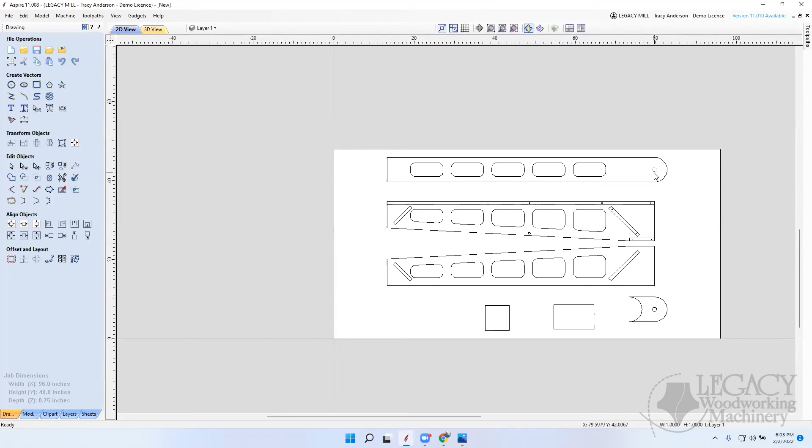And then this is a 1-inch hole. So I used a 1-inch dowel that I got from Home Depot, and I put a shaft collar on top to hold it. So it just comes down and the shaft collar locks it in place up here at the top. Okay, so the only thing we have left here is this support that's going to go on the wall.

Did I mention I hate this mouse?

Okay, so here we go. I want to show you how I would lay this out. I'm going to draw a circle here that I deleted already, and the only reason I'm going to do that is because I need to know, and this has to have square corners. Obviously it was radiused. Okay, so I need to know how to make this top piece that goes right here.

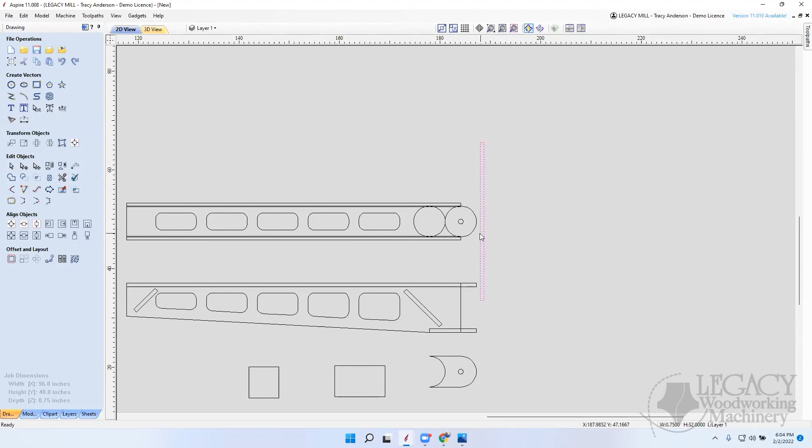And it's going to sandwich this right here, so it's going to go on the outside. We can figure that out in a second. But let's start off by just drawing a vector maybe from this corner to right there, and that would work just fine. We could do the same thing here, from here to there.

Okay, and now I could copy this, or let me just do it so you can see how I do it. I'll just Control-C, Control-V, and move it over here to the side. Obviously I don't need this, and I can trim this up now.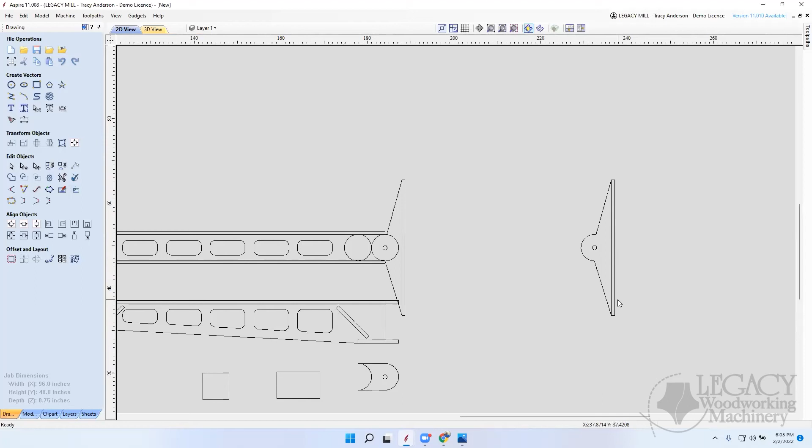And then, this is the dado right here. And then I could create a toolpath to cut this part out, and that's the top and bottom piece right here that it's going to hinge on. And then I need this piece right here.

So if I Control-C, Control-V, I'll just bring it out here and rotate it 90 degrees. I may not, actually, I probably don't want to rotate it, but let's rotate it. This is how long we're going to make it, and we have to decide how wide, how tall it's going to be now.

So I'll use my drawing here. Let's take this and move it all down so I have some room. Okay, and I'm going to have a piece that's going to go like this. And I didn't mean to do that. Okay, I'm just going to sketch this in.

Okay, and this guy here, I might want to move it up 1/8 of an inch. So I just use my arrow keys, but I would use this and move it up 1/8 of an inch. So in the Y, I would go 0.125. And because I cut a nylon washer that's 1/8 inch thick, and cut a 1-inch hole in it, and cut a disc...

And I put it right between here, so that's what it rotates on - it's a bearing material, if you will. So I would need this piece, and I'm being lazy. So let's not be lazy, let's actually finish this off. I'm going to make it 3/4.

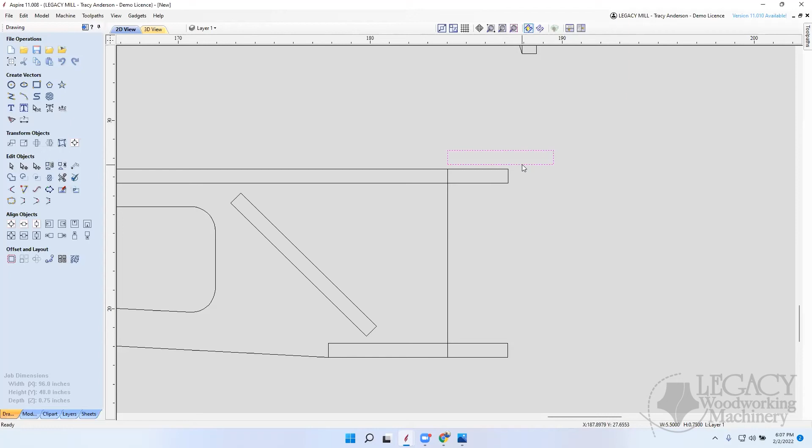Like so, and now it changed the size. In fact, let's undo that - I'm going to Control-Z to undo it, and I'm going to go back in here again. This time I'm going to anchor it to this corner and then move it. Oh, I don't want to draw it - I'm sorry, oh yes I do. Okay, we're going to anchor it to that corner and we're going to make it 0.75.

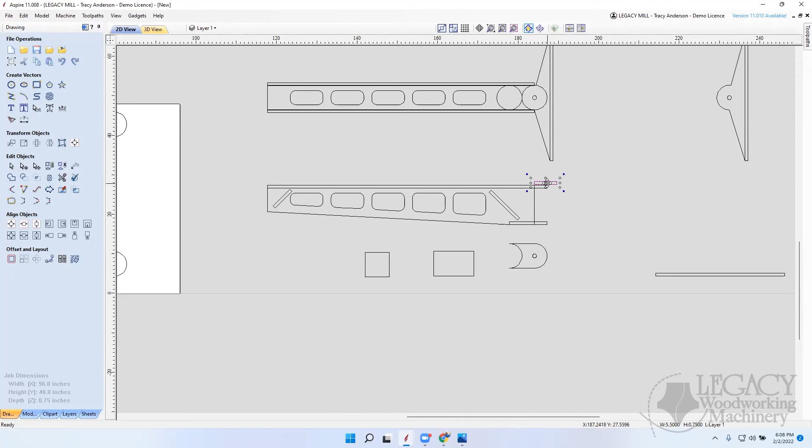And that way... must not have done it. Okay, let's put it back here, and now we'll move it to 0.125. Okay, so there's my 1/8 inch gap that I have on here. And then the base table is going back here, but I'd also have one of these down here as well. So I'll put that there and then I'll use this to move it down minus 0.125.

Okay, so again, my washer is going to fit between here. And so this board that's going to go up and down here is going to be this big. It's going to go from this corner down to here, but come over, and I'm going to make it in the X only 3/4 of an inch. And then we can move it back to that corner. Okay, so I can run screws down through here, but if I want to rabbet this the same way...

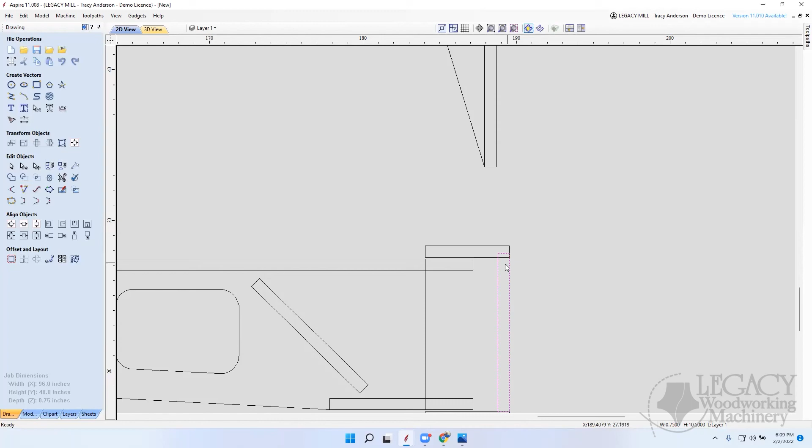I'm going to take this piece and make it bigger in the height by an eighth or a quarter inch, so I'll make it 10.5. And so you can see now that as we cut that dado in the top piece and the bottom piece, actually let me go back and do that again. When I resized it, I need to anchor it in the center. I anchored it at the corner, so it moved it up, but I want to anchor it at the bottom. So we'll make this 10.5.

And now you can see I've got an 1/8 inch going down and an 1/8 inch going up. So this part right here is going to be that long, and I can look down here and see that it's 10.5. So I can simply make this part 10.5 high.

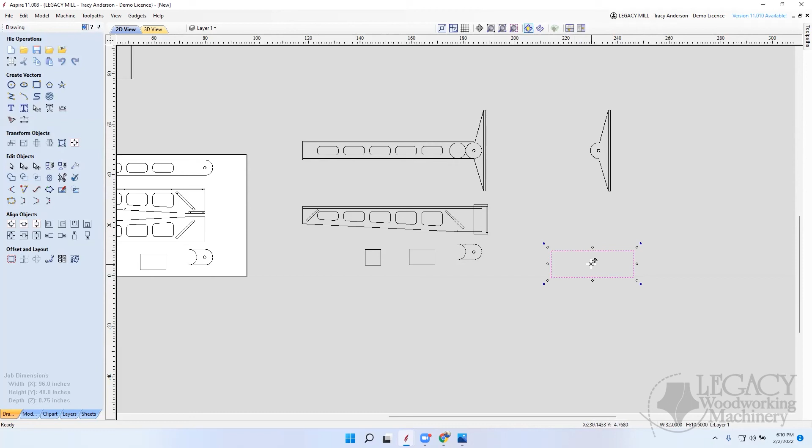Okay, so there's this back plate that we're going to cut out. I'm going to put this over here as well. You might want to put some hole patterns in here, but if you don't know where the studs are on the wall, you may want to just cut this out and figure out where you're going to place it.

And then drill the holes to do that as well. We might find that this works better if we rotate it and then place it in here. And then we can, of course, move all this other stuff and position it where we want it. Now I'm going to have this piece right here as well.

We've already got it drawn. I would have 2 of these, so I'll Control C and Control V, zoom out, and we'll put this over here. And it looks like I might be able to put one this way, and then I'll Control C, Control V, and I might rotate this one this way.

Okay, so I'm nesting this just manually. Of course, you could nest this using the nesting properties, but sometimes it'll nest these on angles and things like that, which I don't want. So I just do it manually and give it enough space to cut all the way around these parts. And then I'm ready to go.

So these are all the components that have the top and the bottom of the plate. Here's the back plate that they're going to mount on. I would put holes along here as well.

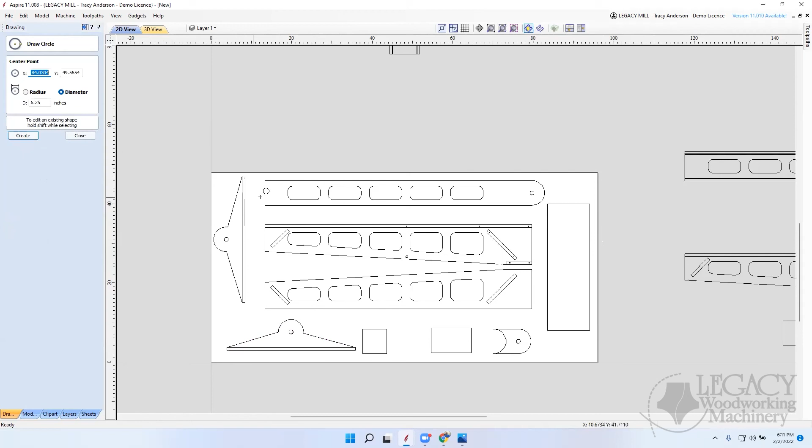And again, I'm not going to bother to do it right now, but I'd make it say 0.2, and I might put it in the center right here. And then I would use the move tool to go negative, minus 1 inch or whatever you want. You could do the same thing on the other end. You could array it, you could do whatever. You want a series of holes along this edge and a series of holes along this edge.

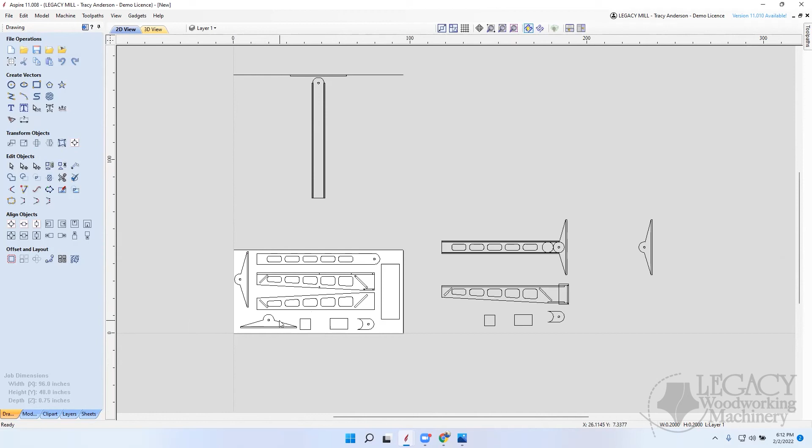And of course, along these edges as well. And I haven't bothered to finish this one. I would finish this one and then mirror it like Carl suggested. Same thing - these I would actually not need to mirror because they're perfectly symmetrical.

I'm going to show you my original design. I made a plate and offset the hole, and I put a part here so that the swing couldn't swing out farther than this angle right here. It could swing all the way against the wall going this way, but when it swung out this way, it would only go to the end of the table.

I didn't want it to come all the way back to the wall. So I set it up this way, but because this is offset, I had to do a mirror image of this plate as well, whereas on this other one, I did not have to mirror it because they're exactly the same - they're symmetrical.

All right, so we're going to wrap it up with this class here. In the next class, we'll program. I will go ahead and lay out the holes and get everything ready so that we can program. And once you have this done, you just throw your sheet on.

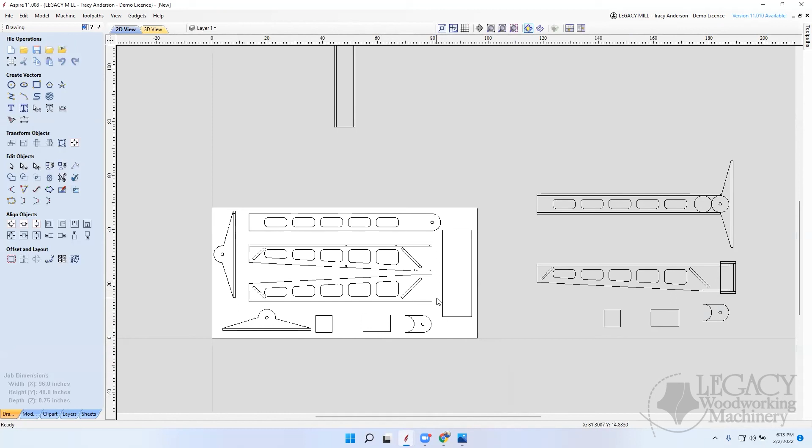You set your XY datum position here in this bottom corner, which in my case is my vacuum table. And then I would set the Z0 using the multiple tools on the base table, and I would turn the vacuum on to make sure I got an accurate reading when the vacuum's on, and do that on the spoil board. Then you just throw this on and cut it once we've programmed the parts. So we're going to call it a day here.

I do want to open it up for any questions, see if you have any questions or suggestions on this part. You might want to dog bone those pockets or those rabbets for the pieces to go in.

Oh, excellent, excellent, excellent. So I'd either dog bone these corners right here, which is probably the way to do it, because then I don't have to radius the other parts. If you don't dog bone them, this would be radiused inside here like we did out here, but it would be the radius of the cutter, and so you would need to round off the ends of these parts with a router bit, which you could do, but dog bone is going to save all of that work. That's a brilliant suggestion. I'll add that to this part.

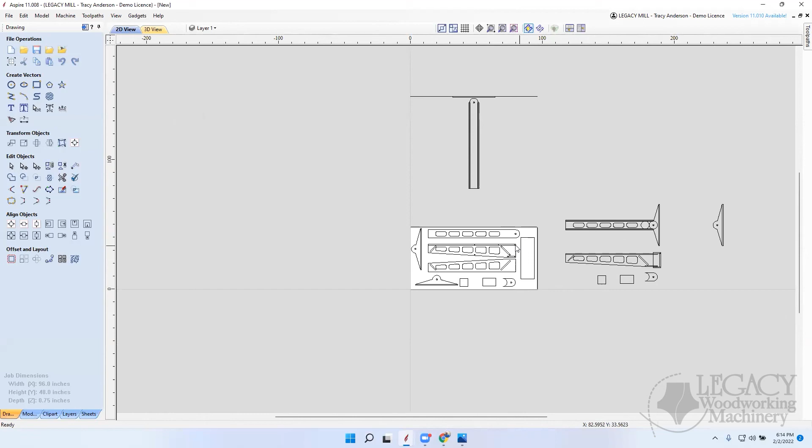Just so people can see how a dog bone works real quickly while we're on this subject. If this was the part and this is the cutout and we want to create a dog bone, then we go into... left, where the freak is the dog bone? Next one over, this one here? Other way, this one here? No, left, there, this one? Okay, oh, here we go. Dog bone.

And then you give it a radius right here. So if I'm using a quarter inch bit, then my radius is 0.125. And then what I would do is just bring this in here and it changes to a check mark when I hit that. I just click on it and it'll create that dog bone. So now my square part will fit in here and it'll clear that corner. Pretty simple to do, if you can see which icon you're trying to select.

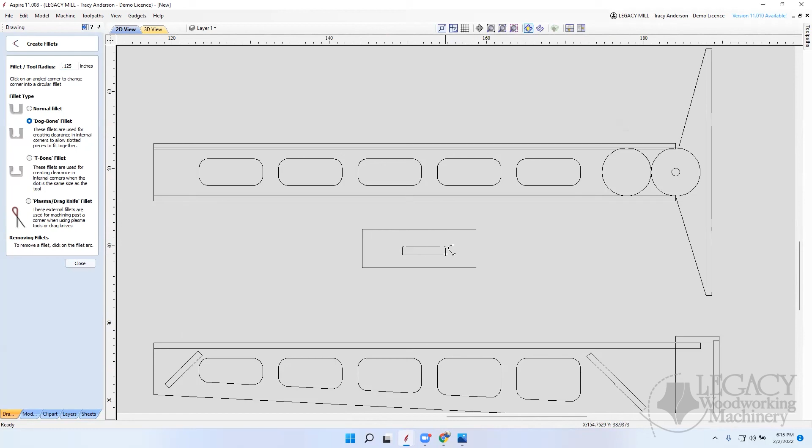I had cataract surgery and I have 20/15 vision. I can see flies on the mountain, but I cannot see my laptop. Okay, you can see the dog bones there. All right, any other suggestions or comments?

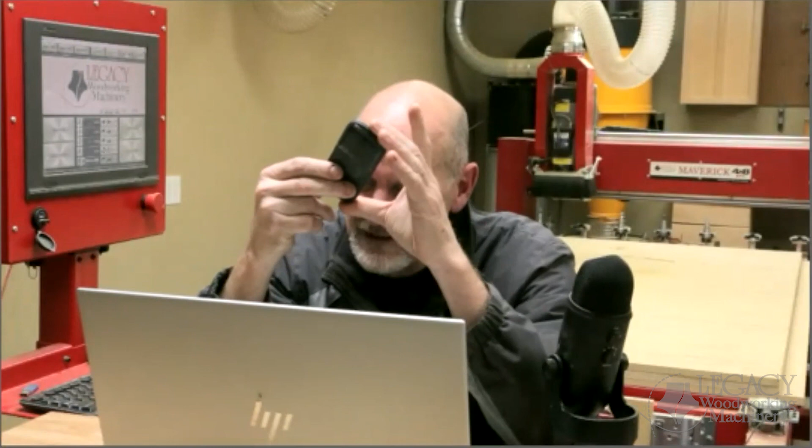Hey Tracy, this is John. Yes. Sorry about that. Real quickly, this is my mouse. It's really clever, I can pack it up flat and take it when I travel on the plane and stuff. It's Bluetooth, so I don't take up my USB, but it sucks, so I'll go get a regular mouse for this. But you hate it, it's great you can travel with it, but you hate it. I travel with it, but I hate it.

Okay, Tracy, John, you had a, yeah. Mark was kind enough to mention that if you go into, in version 11, the tolerance to join, you need to change it from 0 to 0.0 some number. All right, let's take a look. I'm going to go in here. So when I say join right here, it has a tolerance right here. I didn't do it that way. I went in and just drew a line, and then I split the line, and then I put it back together, and I had to put the tolerance in.

Yeah, and just set that tolerance a little bit bigger, like 0.01, and it'll usually snap it. Right, because it's just looking to make sure the ends are within that window or that range. Right, okay, perfect, all righty. Any other questions? Thank you, Tracy.

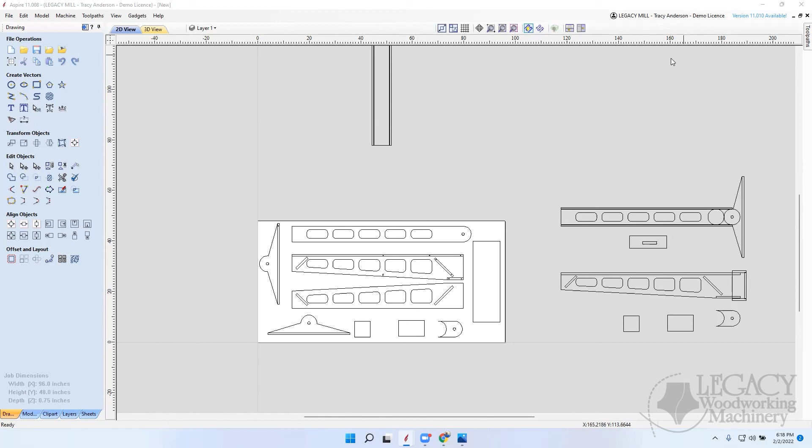All right, just a quick question for Norm up there in the chat. No, I'm looking at his picture. Norm, what do you have there behind you? Is that for your air hose, or is that for your vacuum hose? No, that's the sawdust collection behind me. In the chat, I uploaded a couple pictures there, you can download them if you want, it shows it better. Okay, but I've got a 6-inch hose on mine. All right.

Whatever happened to the beta program? The beta program, oh, for CCAM? Yeah, for CCAM, I've been trying to get a copy of that and haven't been able to reach Cindy or anybody. Okay, why don't you just drop her an email, Cindy@legacywoodworking.com. Because I assumed that we were going to reach out to everybody, but she had like a couple of them, 100 people. You sent emails for it? Okay, would you send... yeah, me, I've sent one. A couple of emails and called like 4 times. Already, I'm in the same boat. Yeah, I'll send you one. I've had the same experience. Okay, drop me an email, Tracy@legacywoodworking.com, I'll make sure that it gets taken care of. Quick question, how much noise did your cyclone make?

You know, I have it wide open. I don't have it enclosed in anything. You can see it behind me back here. And if I'll just turn it on - I don't know if you'll be able to hear it real well, but I think it's 65 decibel. Yeah, that's the Oneida.